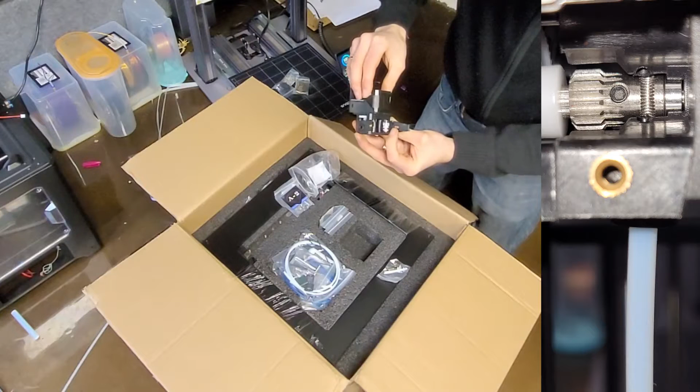So put that back out of the way. So yeah, what else have we got in here? Not sure what that is - might be a filament run-out sensor potentially. Not sure what that is either yet.

Lots of screws, some bowden cable, and some rubberized feet, some super lube - might use that with the wife later. Oh yeah, I even get a little bit of sky blue PLA just to play with.

And then we get to the frame. So let's have a look. So it's good, it's come fairly well assembled already, actually. Hopefully everything's flat, and it's even got, which is nice to stop rust, some cling film wrapped around the rails. So that's a bonus.

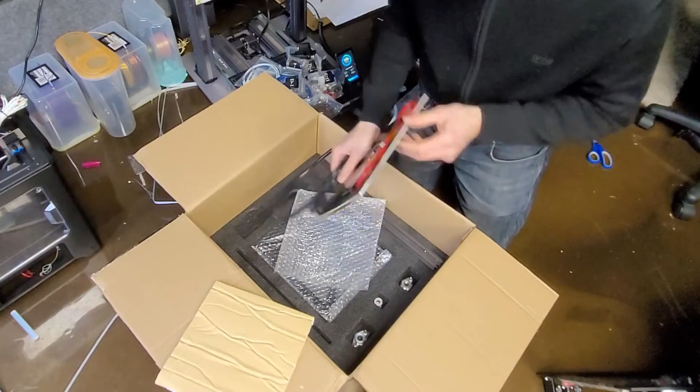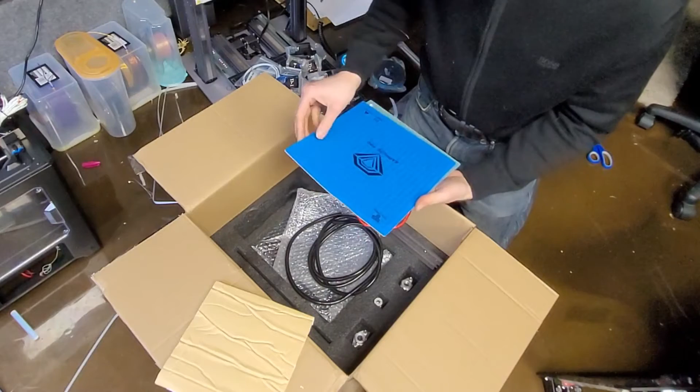Let's just have a quick look at the bed while we're at it. Yeah, 24 volt. Thermistor in the centre, looks reasonably decent. Whether that's magnetic or not, I don't... is it? No, I don't think it is.

But I do have, find it somewhere, do have one of these that again I bought off eBay. You just got to know what you're buying on eBay and know what its limitations might be or what the problems might be for you. This has got 200 MP, 468 MP is better. That'll survive really high temperatures, up to 130, 140 degrees.

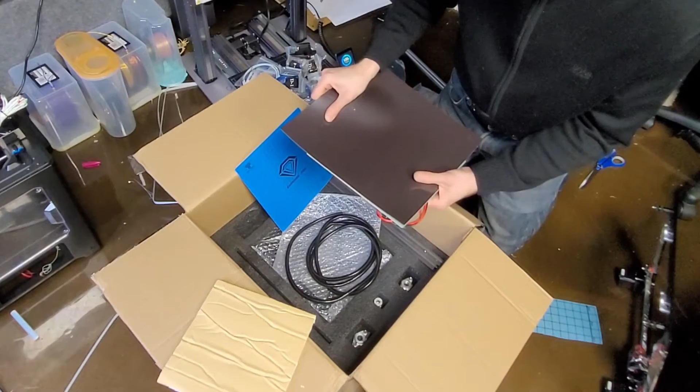But that, you could stick that on there, and you've got a magnetic-ish bed, so you can maybe do that.

One of the things I tend to do is epoxy some, I think it's N45, can't quite remember now, but N45 neodymium magnets underneath here, some pretty strong ones, sort of 7 to 10 kilogram pull force, button ones, and the fact that they're N45, if I'm correct, means they're pretty high temperature rated, so I think they don't lose the magnetism due to the Curie effect till about 140, 150 degrees.

So they're more than good enough to maintain the magnetism. And then you can just have a steel plate with one of these stuck to it, and it's like clunk, and it ain't going anywhere. Really, that bed, yeah, decent size. All good so far.

Cable management stuff, always good. What else have we got? Part of the frame.

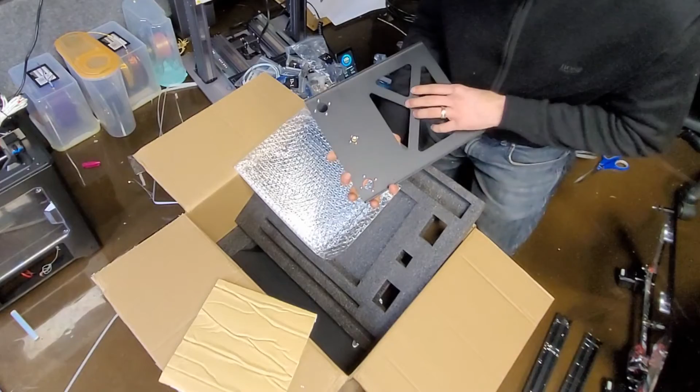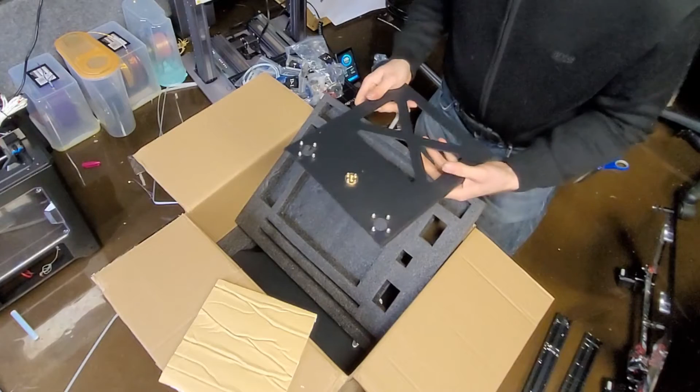Seems okay. So these beds, I mean, we'll see how stiff it is on these things, but it does annoy me that there's a lot that can happen with them sitting there. And yeah, you can offset it with the bed springs, but it varies and stuff. I don't really like those springs and manual bed leveling, it's too error prone. But it won't matter too much for me longer term because it's going to be Duet Wi-Fi anyway.

Get rid of that. Screw, I should put that back in there. And then this, yeah, pretty much looks like the base.

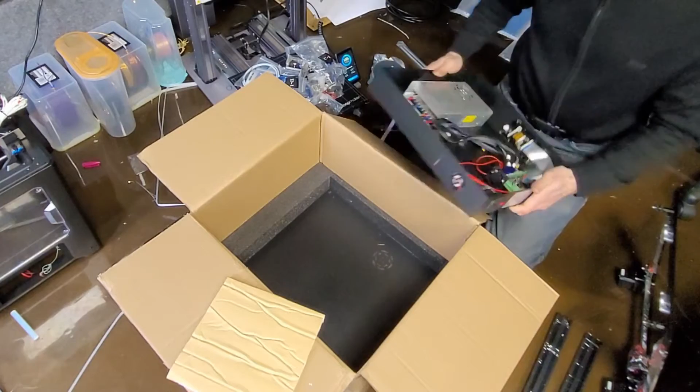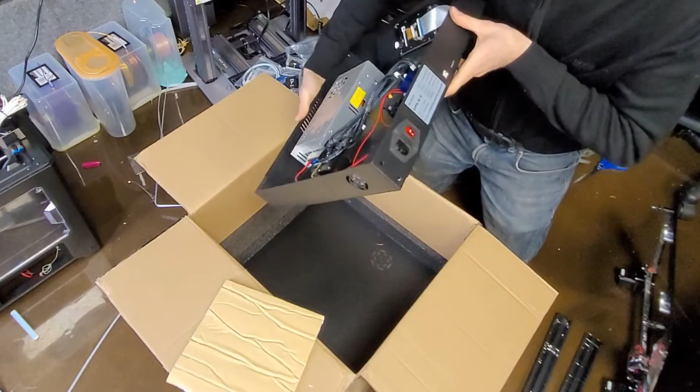So we've got, what's that power supply? Does it have a rating on it? That's probably something worthwhile checking before you plug anything in. It's got a mechanical switch to set it between 115 and 230. It's set to 230 right now, but you never know, somebody might not have set it at the factory, and you don't want to be plugging it in if it's set on 115. What's it say about the power supply? 360 watt, 24 volt. Yeah, not bad.

There's the controller board. So it has, I believe, silent steppers for X and Y, non-silent for Z, not really much of an issue, but non-silent for the extruder, which can contribute to some noise. Again, noise I'm not too bothered about because these things don't stay in here, they go somewhere else that's well out of the way, so it doesn't bother me day to day. It's got a USB-B slot, an SD card slot, and then there's a touch screen at the front. Yeah, looks pretty good.

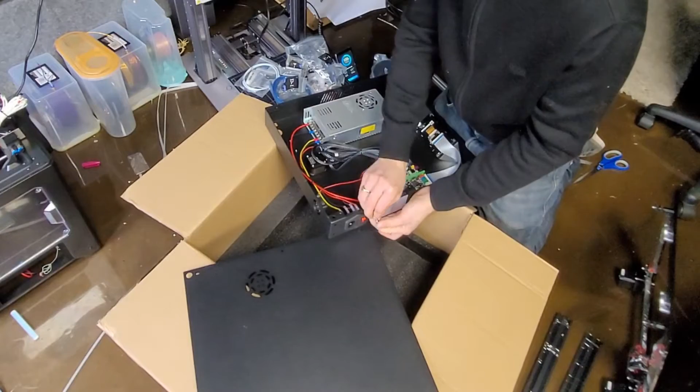The base. Put this back in here. Once it's worked its way out. Get the box out of the way now.

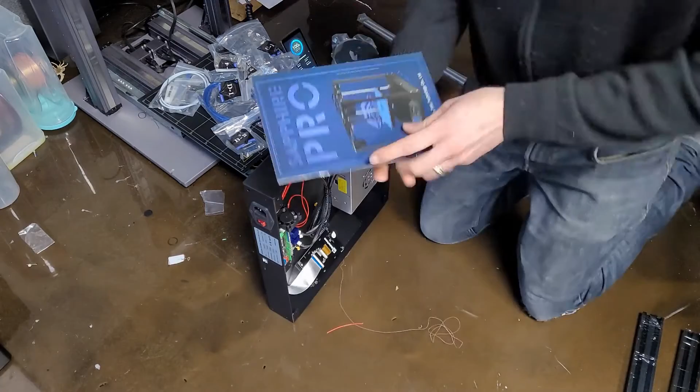Right, so yeah, little joke with the manual. We'll have a quick look and see what's the best way to start. It's worth having a quick scan so you don't do it completely wrong and have to undo it all again, thinking that you know best.

So yeah, instruction manual seems reasonable. Looks IKEA-ish, maybe slightly better than IKEA. Well, it tells you what the connections are. Yeah, it shouldn't be too bad.

Right, let's give it a go then. Might get a new blade, this one's blunt. Right, sharp Stanley knife, that's more like it.

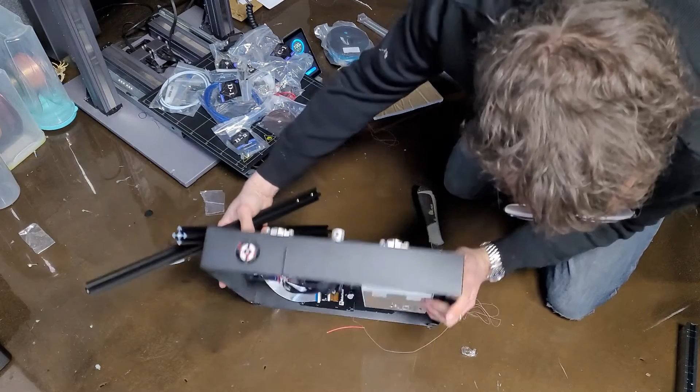Is there any particular way these need to go? I would guess the screw holes line up with the screw holes.

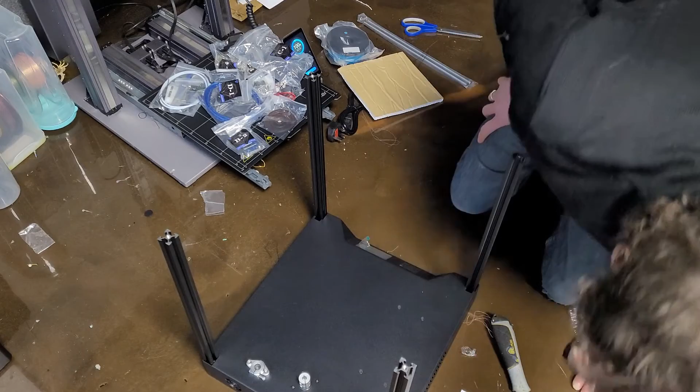321, M5 by 16. There we go, this is A2.

Well, it's all nicely labelled, which is a bonus, especially since my eyesight's not what it used to be. Right, just get the right size Allen key. Come on. There we go.

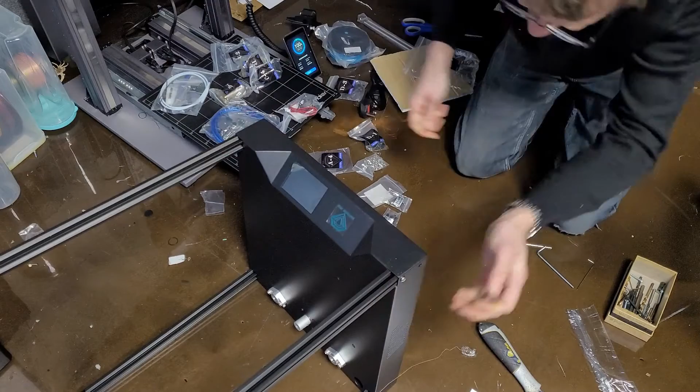It's always good to read. Why don't we ever put these notes at the top rather than at the bottom? Please fix the bottom screws first, then the side screws. And they are A22.

So I'm not going to overly tighten that until we've got the other screw in here. So all the fasteners use the same size hex key as well, which is always a bonus.

Right, just loosen that off a sec. Loosen that one off. Let's hold this up now. Tighten a quarter turn, I guess. And the same with these.

What you could do, if you wanted it to be pretty solid, once you were confident you weren't going to take it apart again, you could probably thread lock these, but I'm not going to do that. That's one.

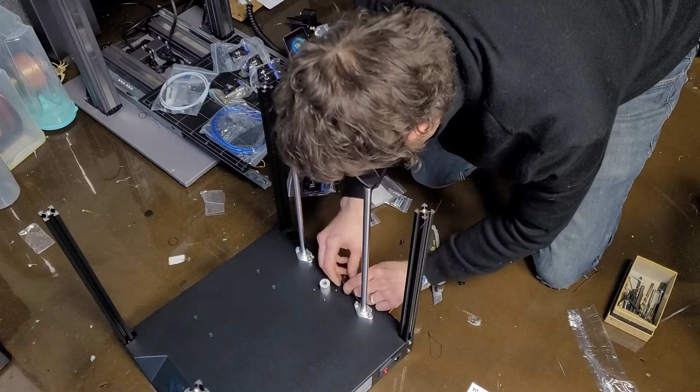Right, so I think we'll go and hunt for the lead screw and then see where we're at. Bonus, it was hiding in the expanded foam. So that wants to go in there.

Okay, so hot end platform, hot bed platform support. So hot bed, yeah, got that. Hot bed leveling screw back.

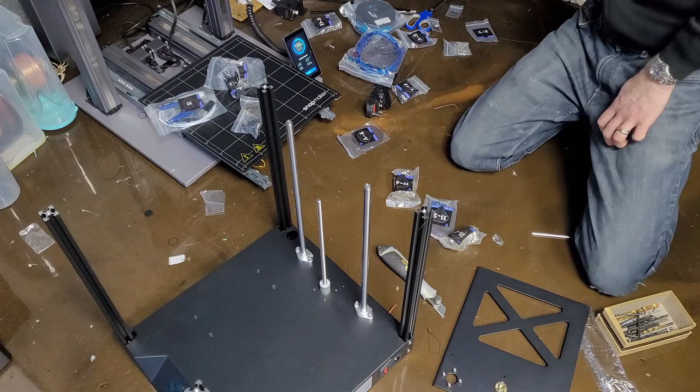So B1, B2, B3, 4, 5. So yeah, the bed looks pretty much like most sort of standard beds, really. Like I said, I don't like these screw things with springs. They're prone to warping, altering when the bed gets hot, all those kind of things.

But it'll do for now. So it's basically bed, aluminium plate, and the insulation cotton. So yeah, I was right, a bit of insulating stuff which has made its way over here. Has it got a sticky back to it? Yep, it has. That's a nice little touch, that, just helps keep the heat in the bed. I'm not seeing any other printer do that.

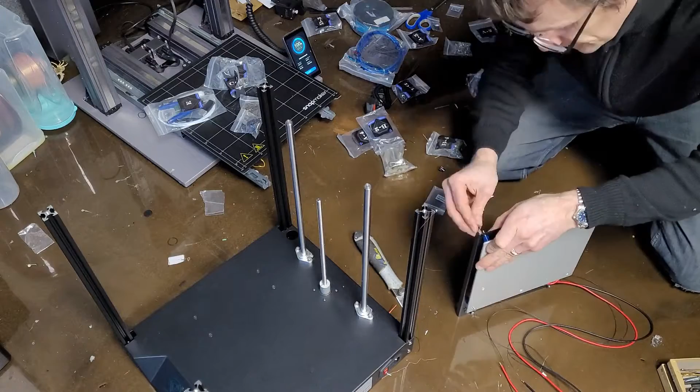Put some, what the manual calls horizontal linear bearings, but I think I'd call them vertical myself, but who am I to say? So let's put these on.

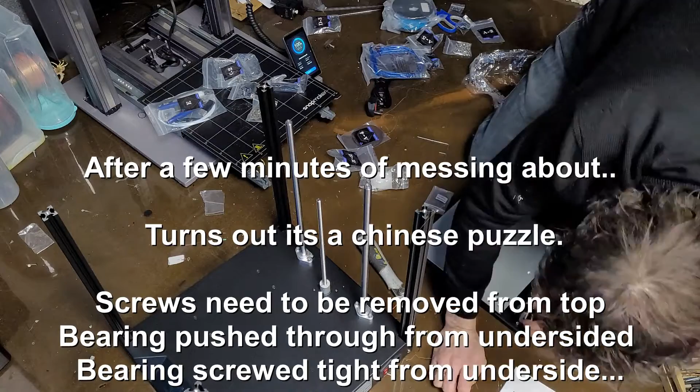Okay, so maybe you have to take these out. And it actually goes like that.

One, two, three, four. Right, bed done. So yeah, it wasn't obvious. The screws come in the top and you have to take them out and put them in from that side. And the cable relief, I'd be tempted to just drill a couple of holes through here and then put a cable tie on. I'll do that later. Okay, so bed's done.

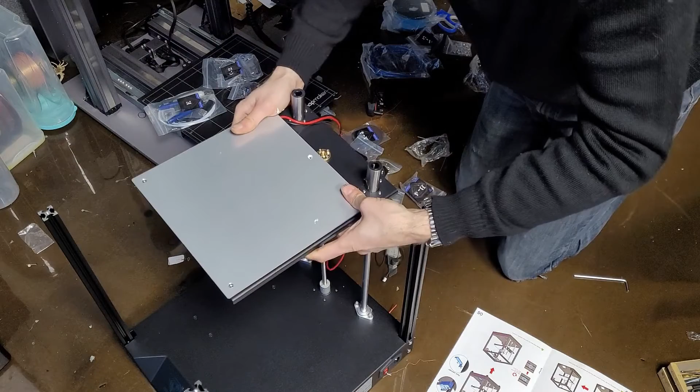The joys of homeschooling.

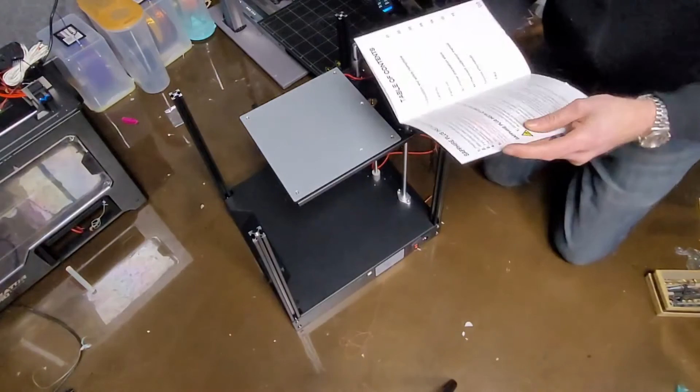Right, so where were we? Build platform on. Right, A5 Z-axis limit switch. There we go. So this is the thing that previously has been spotted as having problems.

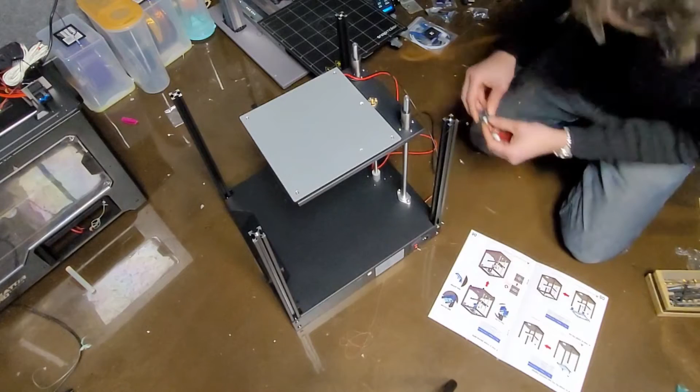And it's due to the fact that that part of the switch, wherever it's going to be mounted, put it on this one, it's hit by the bearing, and it's just, sometimes it can just catch on the top of the bearing, sometimes it might just slip slightly inside before it triggers the switch. So yeah, so it's not great. So basically, just need to 3D print a small thing that sits over the top, small plastic bush, and then it's fine. So I'll do that eventually, but for now, that's just going over the top.

And then we're going to put the top frame on. There we go.

I don't know whether you can... oh, that is lovely. That is absolutely lovely. I don't know if you can see that, but that is really, really nice movement on these rails. Really smooth. It's great. Right, so what do we need?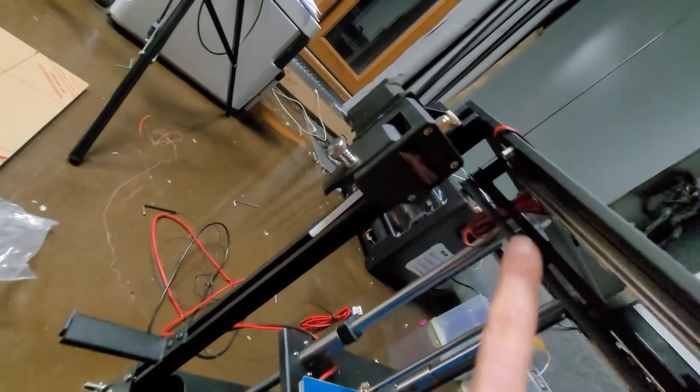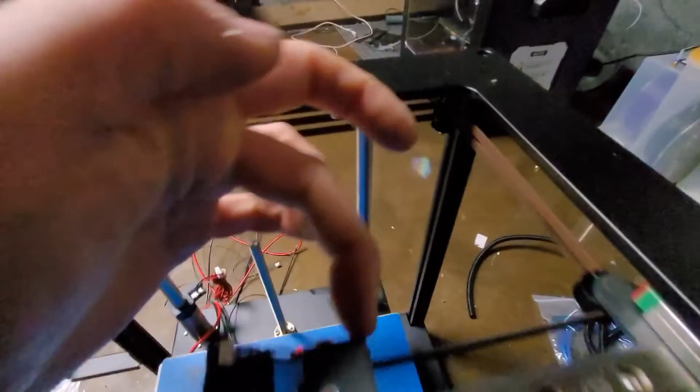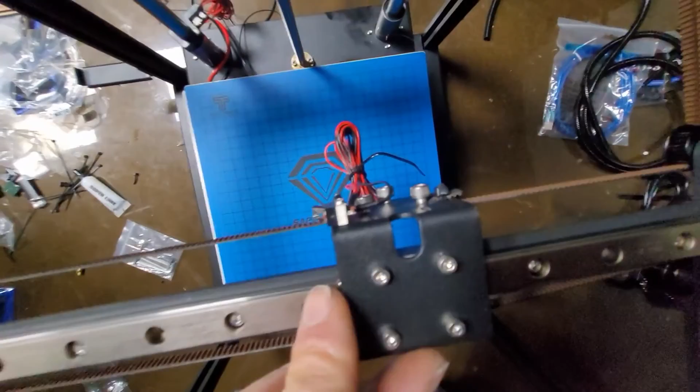You can see stepper motor, upper pulley, upper pulley, upper pulley, upper pulley, and then it loops round and is cable tied like that. I originally did the cable ties on this side, which would work okay, but it basically meant when this went back to its home position, the extra bit of belt would stop the switch hitting there.

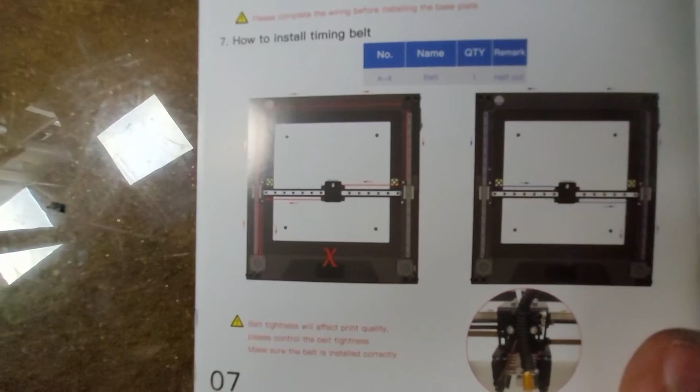So yeah, you need to do it the way it says in the manual. But just for a laugh - probably the most important bit, getting the belt set up - this is what you get in the manual. You get that one picture showing which is the X and which is the Y belt and where they route, which is sort of useful but doesn't explain anything about the pulleys.

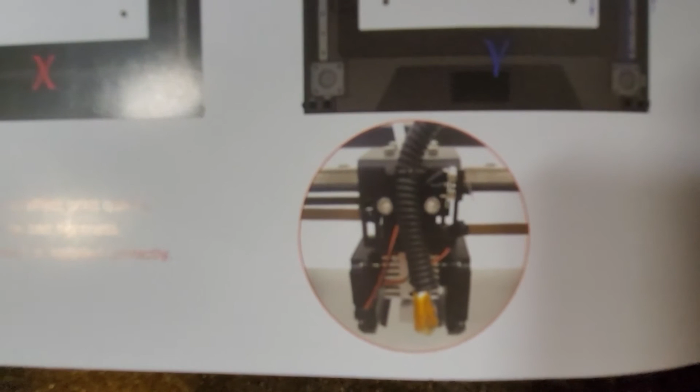And then, well, you can't really make out anything from that about the way the belts are connected. Anyway, so yeah, all the belts are connected and the platform moves quite nicely. That knocking noise is just this thing rocking on the floor.

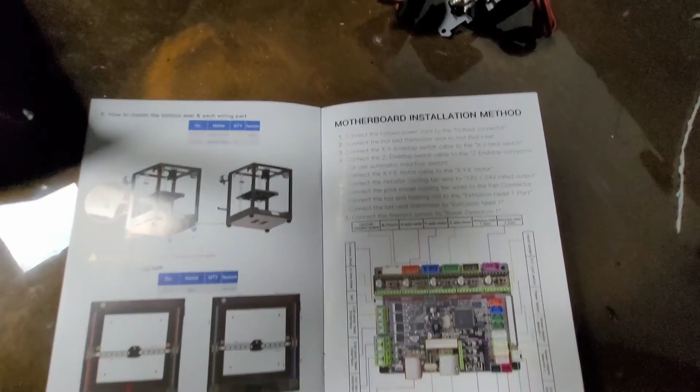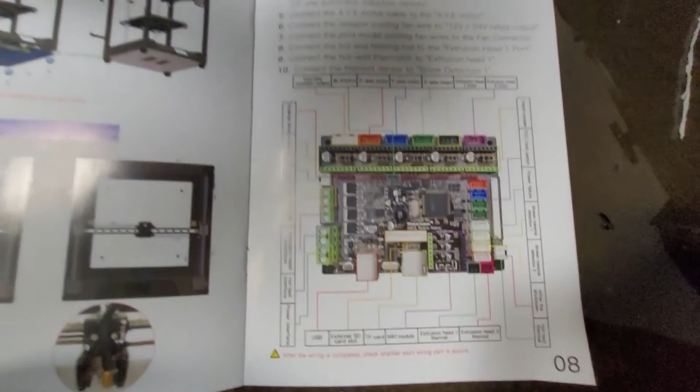So yeah, the next bit is powering the motherboard, which it does explain quite nicely. On this carriage, I think what I'm going to do for the time being, just so I get a known baseline, is just wire everything up to the standard motherboard and go from there. So that's what I'm going to do next.

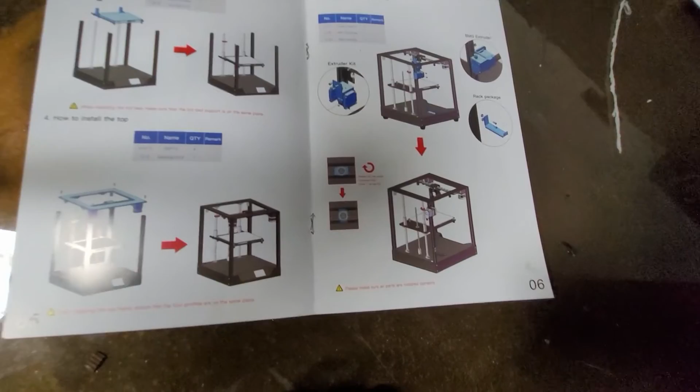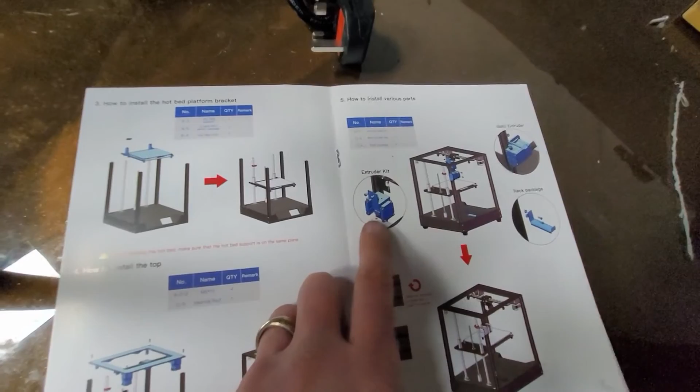It doesn't really say much - kind of weird - does it say anything about installing the hot end? Not sure that it... no, doesn't really. What does it say? Oh yeah, kind of, it's at this point - extruder kit. I'd have called that the hot end really, but anyway, we need to put that on.

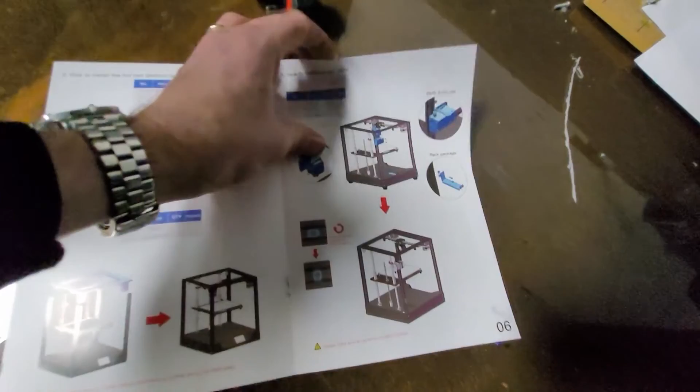So it's kind of in this step - that's the extruder. But it's not bad instructions, though they're not the best. Alright, so we'll install all that and then start wiring everything up.

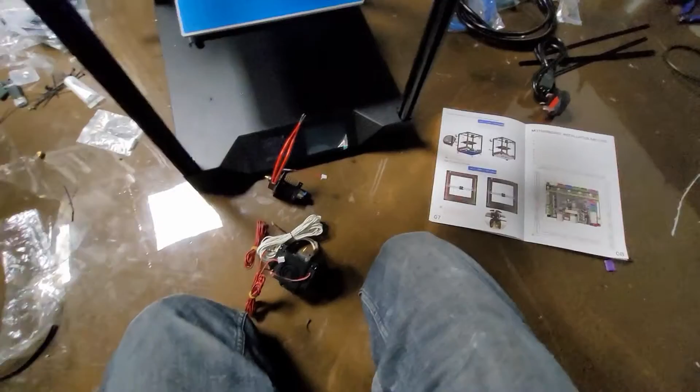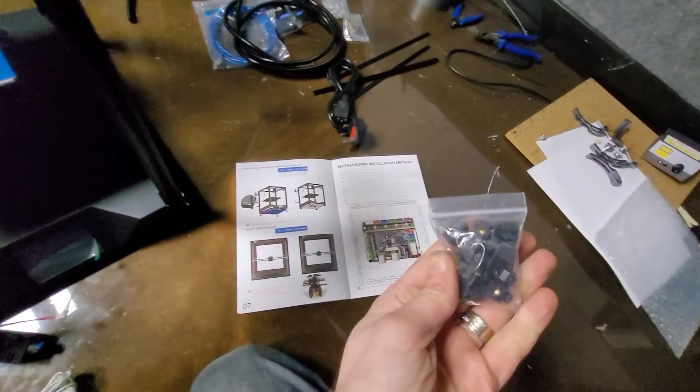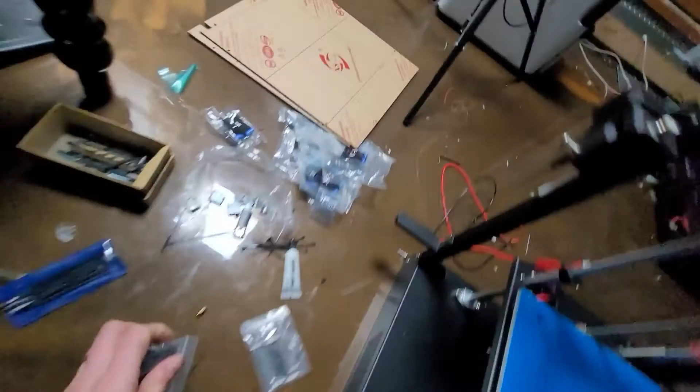Well, actually, one other thing is I bought the Pro version, so it's come with the acrylic door - well, the acrylic sides and door pieces as well. That's all around here. Nothing in the instructions about how to put that together, but I suspect it's this bag of these things which will go into the linear rails and bolt onto these points here. There's hinge points for the doors, and you get a whole bag of screws that go with it.

And then these hinges which have got kind of nice little moulded lion heads on them - cool. I'll put that all on, but I'm going to do that at the very end, and we'll get all the wiring sorted first.

Right, so let's put the hot end on this carriage here.

So actually, I've got lots of tools and printers, but I didn't realise they do give you some lube, which will be for this Z-axis here. Give you a set of Allen keys and little screwdrivers and stuff, which is useful. You also get the USB stick and an SD card slot, 4 gig, unbranded.

If it's anything like the clone Duets that come with a whopping 128 megabyte card, they're really unstable and burn out pretty quick. Hopefully that's relatively stable. You can get all sorts of write errors with the ones that come with the clone Duets - you just have to replace them straight away. Anyway, let's...

Whack the hot end on. This should be a little bit easier than doing the belts.

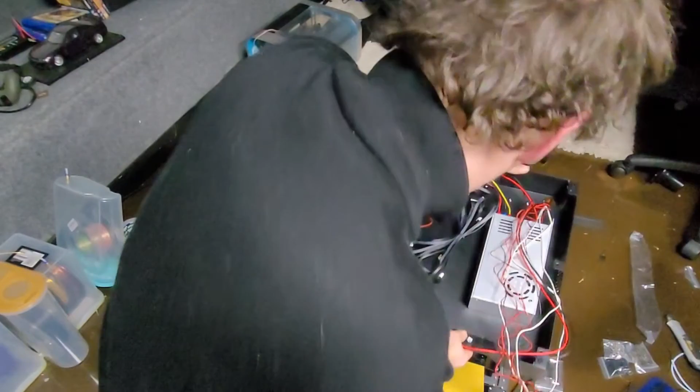And then we need to start to wire everything up. So all the steppers are already all wired in, bar these wires - that need to go back up and go the other way. Let's do them.

So it's X and Y motors and the extruder, and they are labelled, I guess. X and Y, and E here for extruder. Yep. So I'm guessing extruder probably should go back up there. The X and Y you can run up the side to the motors.

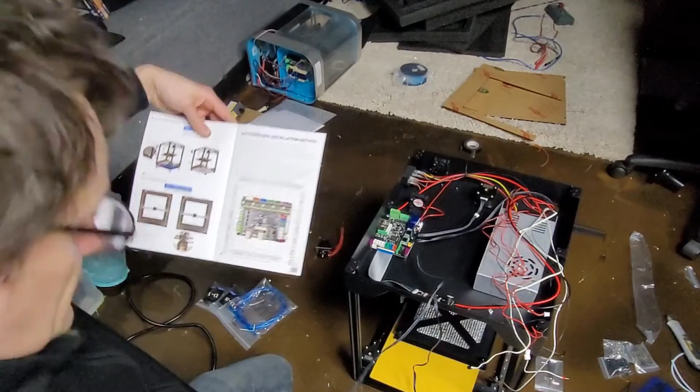So which one is X and which one's Y? Remember from the instructions. So that's X. Yeah, this one's X. Y, go there, X. Go there. There we go. Leave out of the way.

Just while we're here, let's get a Duet Wi-Fi. So we're going to the Duet Wi-Fi board, I suspect. Let's just try one of these on here - I suspect these should all fit relatively easily. Let's take the extruder drive, and that would go to the same pin pitch. Hopefully it is - yeah, it is. So I could fit one of these pretty easily. The only thing that wouldn't work with this is obviously this header interface is totally different. But fitting a Duet Wi-Fi and then a BL touch to that shouldn't be any major hassle at all.

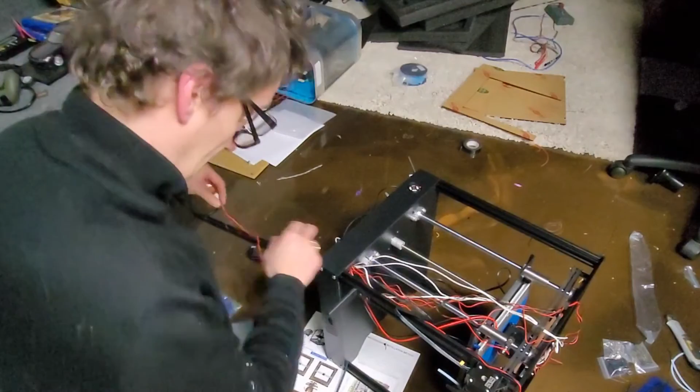So yeah, if this would have been one of the first printers you've ever built, you might end up with a few hiccups along the way. Luckily it isn't my first printer, but I'll save judgment and not say anything.

And there we go - look, so it's got Z on that one and Z on that one. Oh, you can see that, but yeah, not helpful. And obviously in here it's also not helpful, is it? Well, would I do it to Z min or Z max? But it's obviously a minimum end stop because it's the bed close to the nozzle. Shove that in there.

There's quite a few other outputs on here, but that is pretty much it. Got the hotbed and the thermistor, got the X and Y end stop, got the Z end stop, got the motor cables connected, the radiator cooling fan, which is the hot end cooling fan, got that done, print model cooling fan done, and filament - I'm not bothered with the filament sensor break detector. I might do that later, but hopefully you can turn it off in the firmware, or it's a normally open switch that closes, because if it's the other way around it's going to think there's no filament all the time, but we'll see.

So that is it built. I'm just going to pull these cables through a little bit and tidy it up just for now.

I'm just going to do a little power on test, and then I'm going to put all the acrylic sides on once I know it's set up right. The only bits we've got left are the filament sensor, which I'm not bothered with, the USB lead, and then all the feet for the base, which I'll put on at the end.

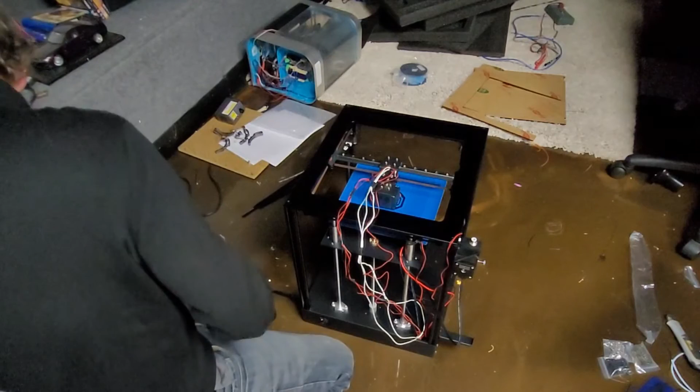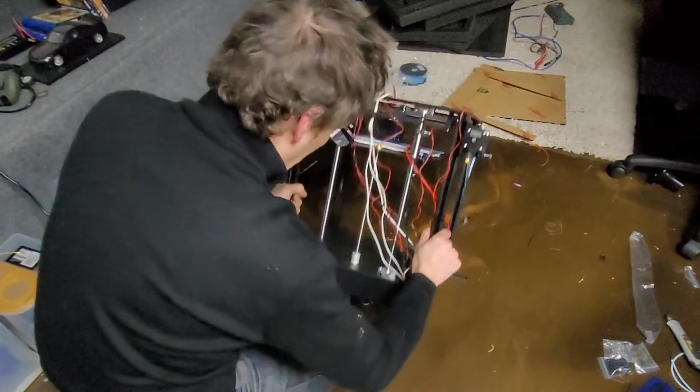I think we're all alright. That can be a bit short - that lead from the Flashforge, I think. Use this one for now. I'm just going to double check, I'm pretty sure that power supply was set to 230 volts.

Yep, that's what it's showing. So let's plug that in, turn it on. So like that, there's no wires going to get chopped in any fans. It's a good start. What does it say on the front?

So, I don't know, let's go on settings first. Motors off, okay, language - it's in English obviously at the moment, yep. Touchscreen's pretty good, responding. About, fan, let's see - 100%.

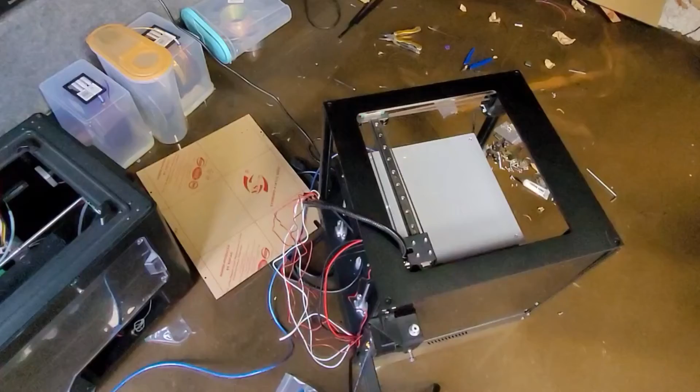Okay, so we had a little bit of a nightmare last night when we'd assembled this. It's not particularly obvious from the instructions how it should go. I'd assumed the hot end was bolted to the back of here, and I bolted it on the wrong way around, and I'd routed all the cables through there, which is a bit of a pain. So after a lot of faffing around and realizing it was the wrong way around, I put it in right. It doesn't really show you in the instructions how it should go, but basically it butts in that way so that everything's in a vertical line, whereas I had it hanging off the back, which is why it was crashing into the Z-axis supports. But otherwise, yeah, everything's right. It all works.

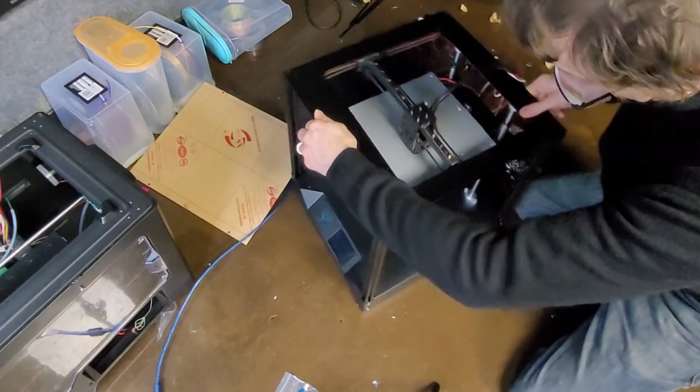So what I've got to do now is put the acrylic sides on. I've put one on already. There's no instructions at all with the acrylics, but basically the way they work is you put these pieces inside the linear rail guides, turn them 90 degrees, slide it to where it needs to be and where the screw holes are, and put screws through, which is great, except here they've drilled the hole right where the stepper motor is, so I'm probably going to drill another hole. There's no easy way at this point of getting one of these in there, sliding it up and turning it around - it hits the stepper motor. I'll show you on this side. There we go - you can see you can get one in there, rotate it, drop it down to where it should be, put the other one in, rotate it. No chance, and you can't get it in and round either.

So back in a minute when we've drilled the holes in the right places for this. Yeah, so drilled the hole - it's probably about just an inch further down, so 25-30 millimeters. Now it mounts correctly, and you can get a screw into that rather than the original hole, which is right fouling where the motor is. So that's good. Now I did fit one side last night and haven't done that, so I'm going to drill a hole in there in a sec.

And then we need to obviously take all the protective cover off. I had a real faff with the one last night - let's see what this one's like. There we go. It's quite weak with the paper fibre, so it ends up ripping very easily. Let's see what this one's going to do. Yeah, there you go, so it's starting to do it already. Ripped up at the top.

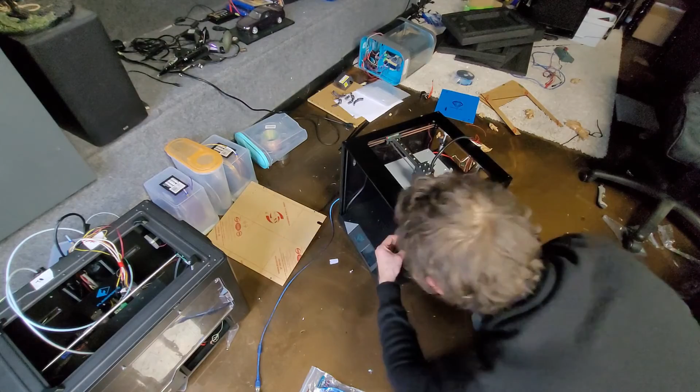Right, so you can see now that's a little bit fiddly. Anyway, let's put this on. Simply just shove that through there, slide up one of the pieces that we put in, line them up. Get that on. They don't need to be particularly tight - if you over tighten them, you start to put stress marks in the acrylic.

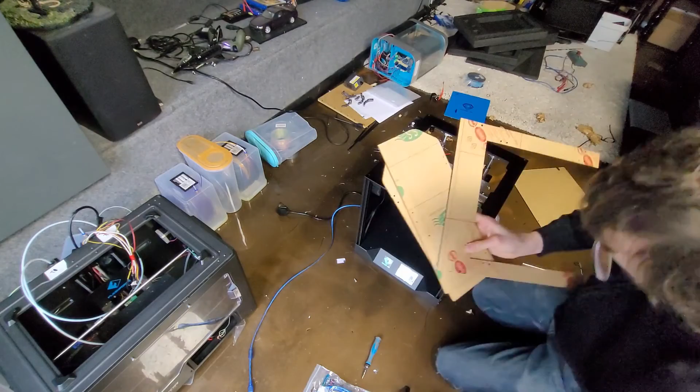And the front piece, you get this archway that's going to go on the front, and I guess that's going to go in there, and then you get these doors, they're probably going to go on something like that, I guess.

No, will be going on like that, and like that, and there's a hole.

Just slide the machine out of the way a sec.

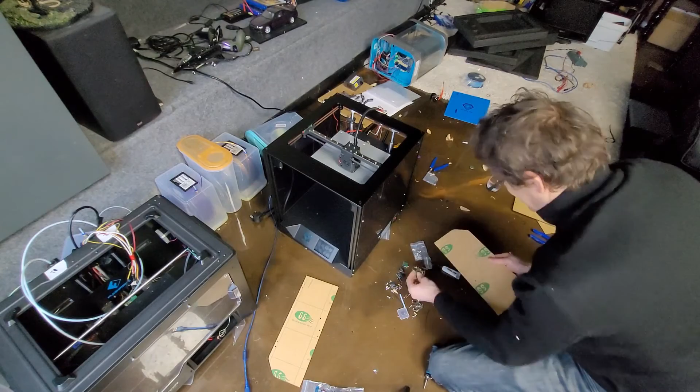You get a whole bunch of hinges for the doors, and then you get these nice little - reminds me of the movie Labyrinth years ago - these little lion door knocker type things, and a pretty chintzy latch, old school latch, but it does the job.

So I'm not going to talk over the rest of this. I'm just going to film it, and we'll do it quick. So we'll do the front piece.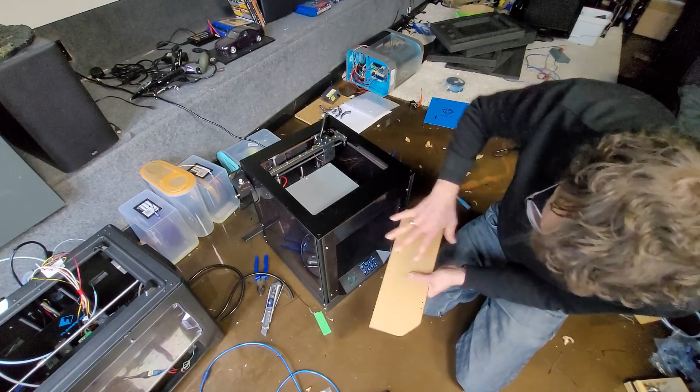Needs the doors going on, but we'll leave them off for now. But they obviously go like that. So -

What's interesting out the box as well - not that it's going to matter because I'm going to swap this to Duet WiFi in a minute - but the firmware on this, if I want to move the Z-axis, it says it's 220 by 220 by 220. If I go on Z, it's home Z.

Right, so let's move Z down. 10, 20, 30, 40, 50, 60, 70, 80, 90, 100.

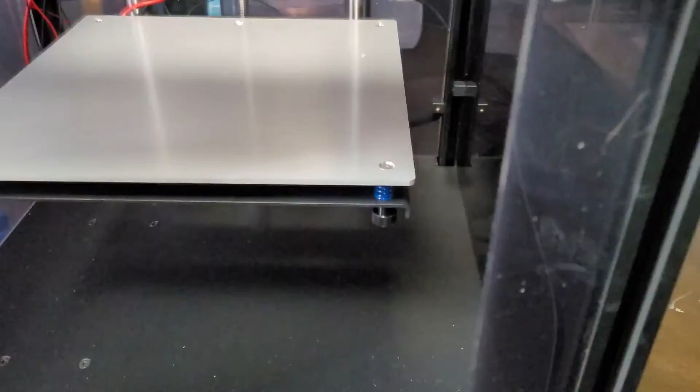Yeah, the maximum Z is 180. It won't go any further, and you'll see where the bed gets to in a minute. So you can see on the screen there, 180. It stops, and there's quite a bit left.

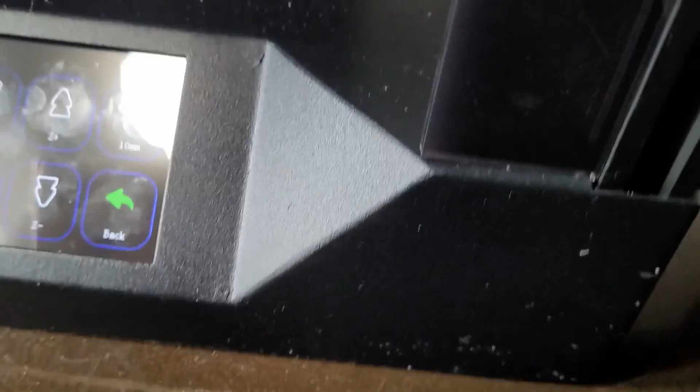I can't see anything obvious in here, unless it's in more maybe. Nope.

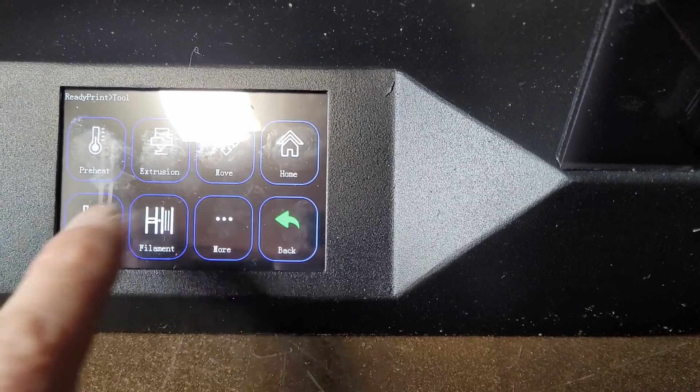Auto level, wonder what that does. Yeah, it doesn't do anything because I guess there's no probe. Didn't think that would work.

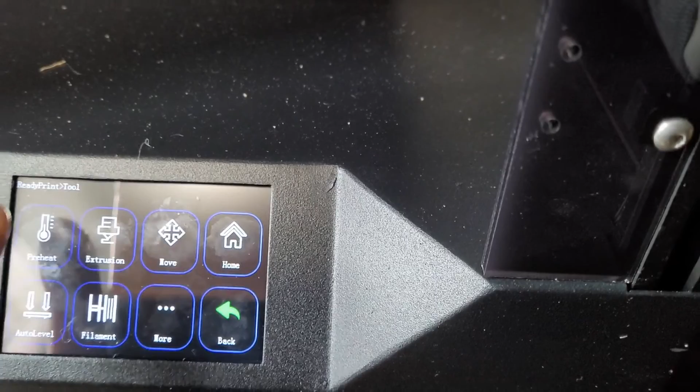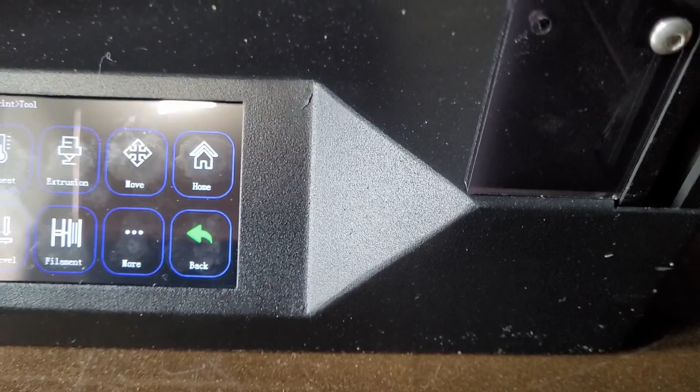Preheat, extrude, yeah, all that stuff's gonna do. Oh, maybe it is gonna do something. Not really sure what that's gonna do. While we're waiting to go back. Printing, there's nothing. Settings, WiFi, fan, about.

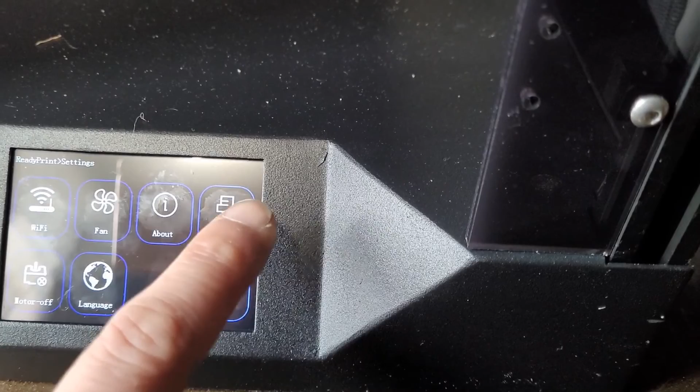Continue - that's resume printing from power off. Turn the steppers off. And that's it.

So yeah, pretty weird. Don't know why you can't give it 220mm or whatever it's supposed to be. But yeah, not sure.

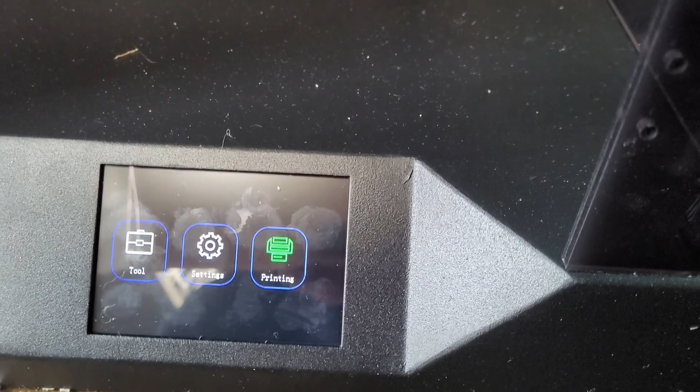Let's just see what this - let's just go into this settings and auto level and see what it does.

Yeah, don't know, but that, my friends, is going to be the end of that motherboard as we know it, and we're going to stick a Duet in there now.

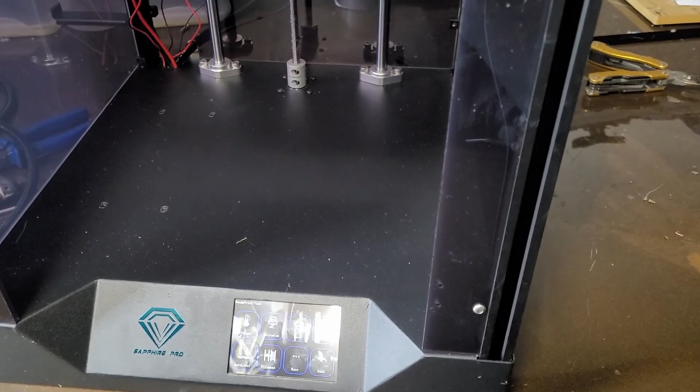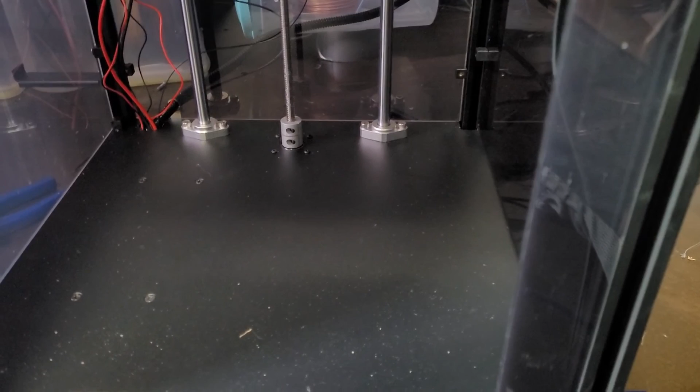But what I'm going to do first is put a USB cable via serial, which goes in around this side, connect to the board, and just do an M503, and get all the basic firmware settings such as E-steps, extruder, sort of cal - doesn't matter too much because I'll just do an auto cal on the Duet. But max accelerations, jerk, all that basic stuff, end stops, just useful to make the setup on the Duet a lot quicker. Right-o, let's do that.